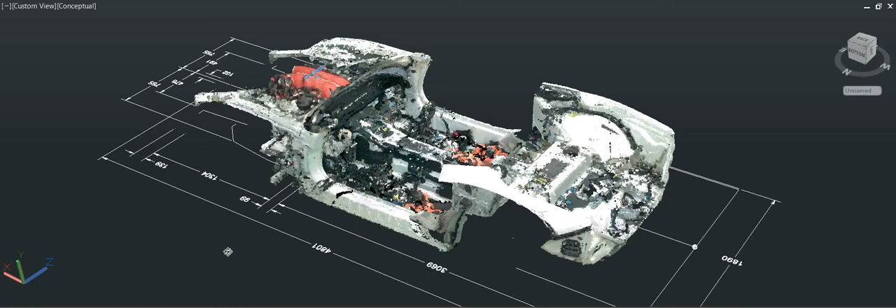Okay, here's our original California chassis. What we've done is we've cut the wings off to make the chassis square and take away the waistedness. But it's basically the California chassis.

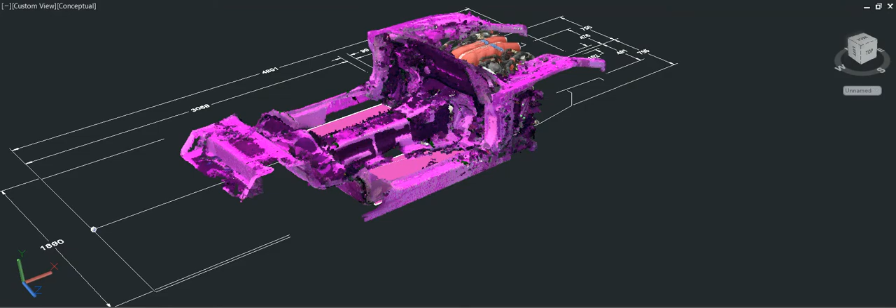We then remove all of these rear items here, and then the chassis looks like this. So at this point, we are square, we're short enough, we have clearance for the doors, we have pinched away all of the sections.

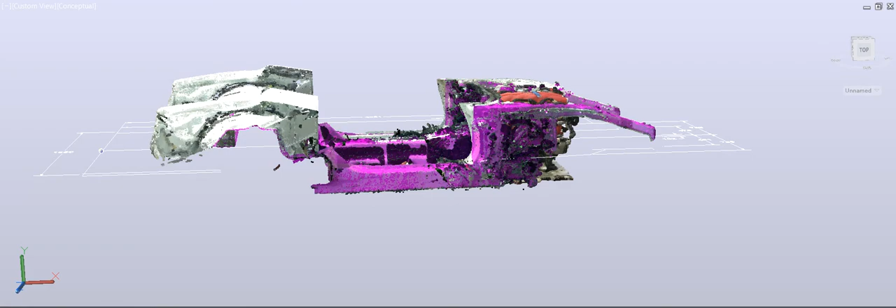Notice these are vertical, no longer curved. Curved, vertical, curved, vertical. Everything fits inside the shapes now. So we trim it down to this here.

At that point, we can mount the rear body. The rear body fits.

The original doors fit within the original door frames that sit right on top of the California. These are the door sills for the 250 sitting on the door sills from the California. Note that the California steelwork is behind the 250 steelwork.

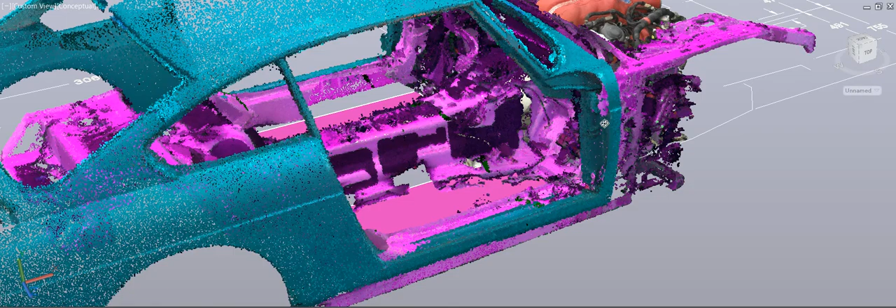The 250 steelwork is here. California steelwork, as you can see from the other side, no longer exists. So we'll bolster that up. We have to trim away this section to make it clean.

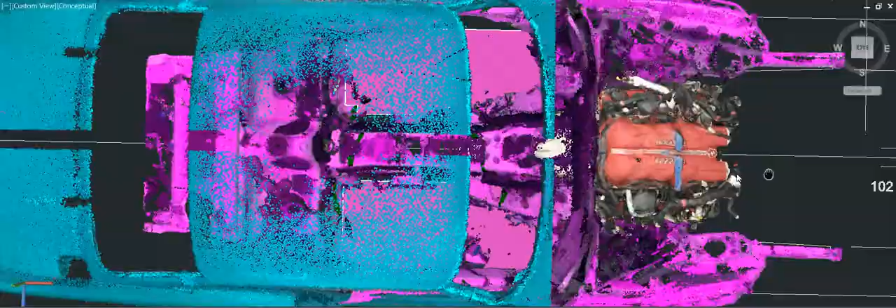But essentially, here's our body. And our gap right now is 102 millimeters.

Engine in, chassis on. We then go and add the wings.

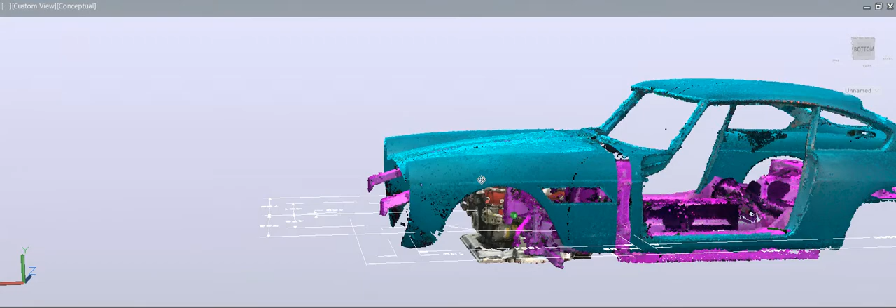You can see from the front wings that we've moved them away from the base of the windscreen, extended them forward. These two are the crash bars for the 250, for the California.

So the wings sit up and over the top of everything. We know that they miss everything, so we're going to have to make mount frames to sit within these spots here.

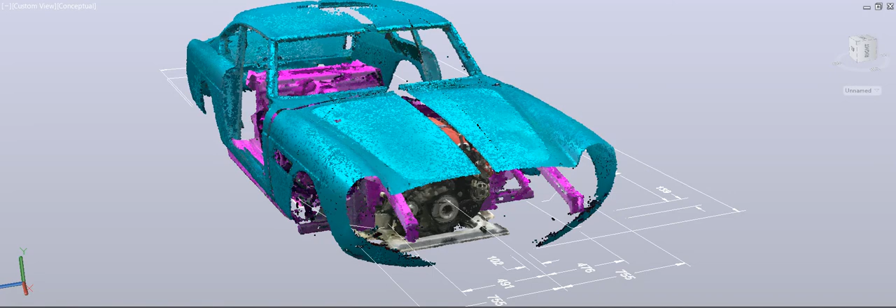We then bring in the nose, the California. Again, that has to be moved forward to accommodate the crash bumpers from the California. So the 250 nose extends out, the wings extend out.

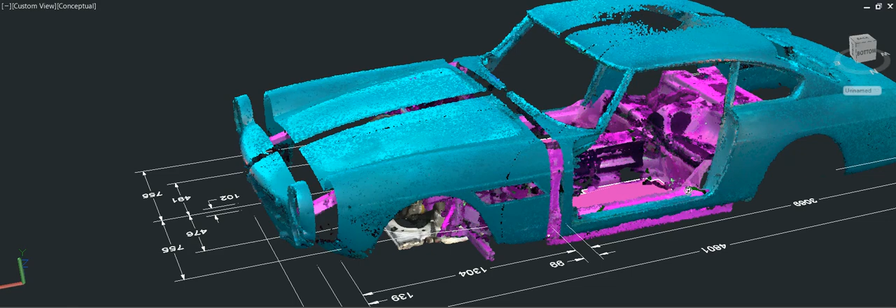The body is untouched, the doors are untouched. You can use the original doors, original side windows, original door windows, etc.

Then we're going to throw some sheet metal for the extensions. So these are the sheet metal extensions as they are right now. You can see the profile of the vehicle.

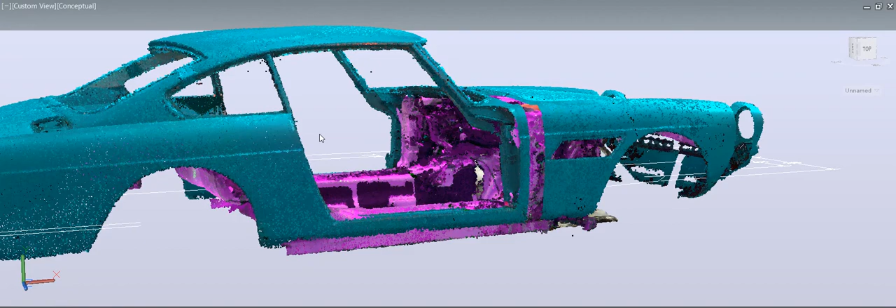If we add some nominal wheels that are set to the width or slightly narrower than the width of the California, which is measured at 1915 millimeters, and we have 1890 millimeters on width.

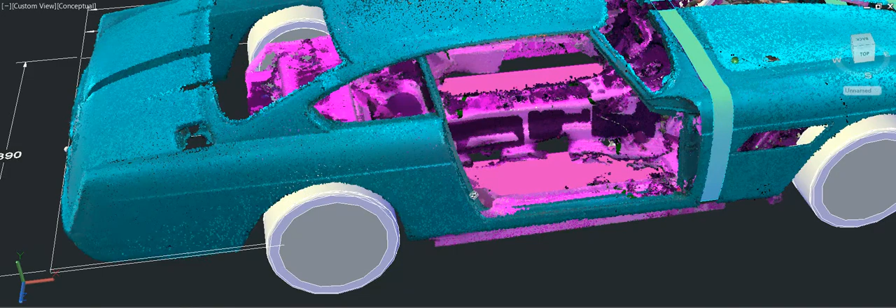So you can see that these do protrude from the body frame when it's mounted.

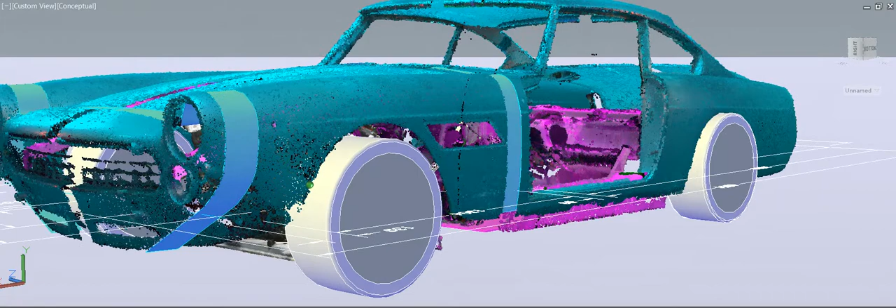We'll also have to lower the 250 along here so that it matches the bottom line of the California, which is a much lower vehicle in general than the 250, as you can see.

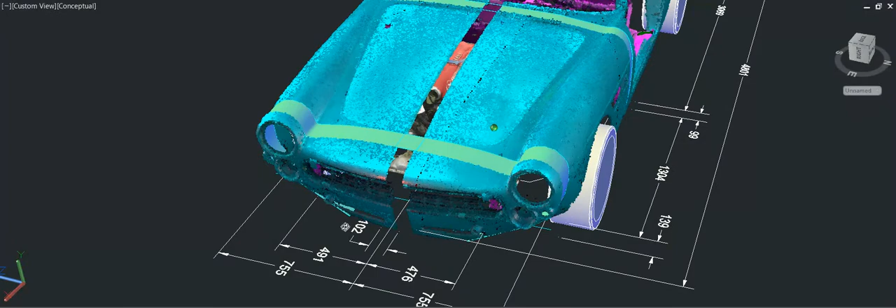But our body split is 102 millimeters. Our overall body length is 4,800 millimeters. Our wheelbase is in fact more narrow than the California's wheelbase, the front and rear stance.

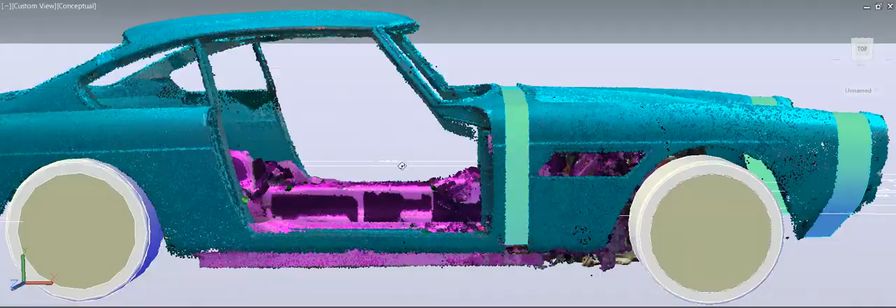We can use the entire 250 cabin doors internals. At the moment, this seems to be able to fit, and we can see that obviously the California bell housing fitting within the California chassis, so we don't touch anything on the underside. Everything is original California.

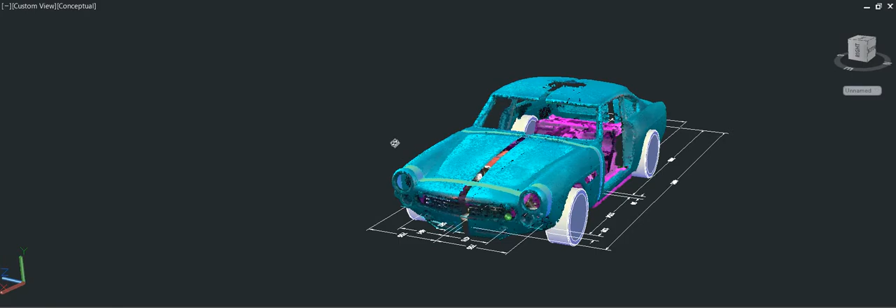It's apparent that the wheels and the tires, the frame will require some type of blisters or widening of the arches here to accommodate these wheels.